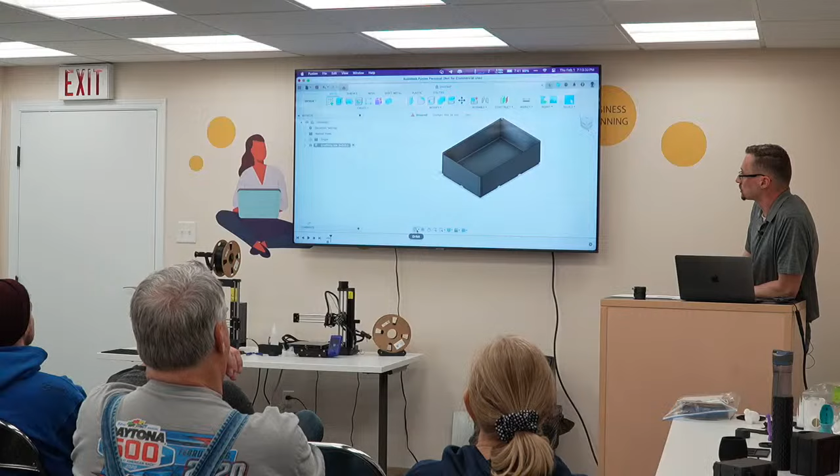And in CAD, let's just say this is a box of some sort. This is just a 3D rendering of an item, and it can be a certain height. You can actually edit it, you can do a lot of stuff with it, you can start from a blank slate, et cetera.

This is a beast of a program. It can be very maddening some days, but I think that's the definition of CAD in the second definition in the dictionary. But more importantly, this is free for personal use, for non-commercial use.

So I can have up to 10 files in this program editable at any given time, meaning if I'm not working on something, I just mark it as read-only and you're still working within the 10. I've never run into an issue. It's a great program, tons of advice online on how to function with this. And as long as you're not using it for commercial purposes, it doesn't cost anything. So it's a really great program.

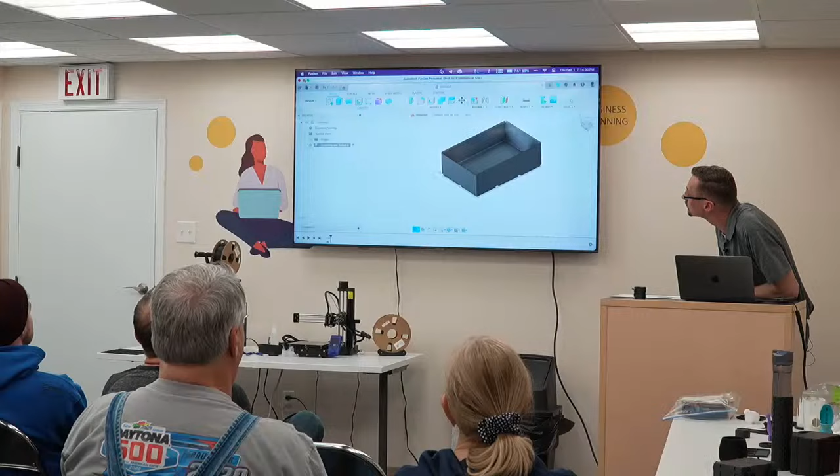I'll exit out of that if I can find my mouse. Two different screens. The other one that's really common and seems to be taking shape right now is one called Onshape. It is a web-based version, if I can say, of something like Fusion 360. I understand it is quite a learning curve to get into, it's a very different mentality to use, but it is completely free for non-commercial use.

And of course, they want you to pay for extras and bells and whistles, and maybe storage or something like that. But from what I understand, you don't need to do that.

Past that, the other one I wanted to talk about is something called Tinkercad. Some of you may have heard of that. I know my daughter has, because this is a big thing in education. However, I actually think this is a really good starting point. Autodesk also makes Tinkercad, and it's fully available online. Let me pull it up here and make sure I'm logged in to show you what I'm trying to show you.

And then I hit the wrong button. But essentially, Tinkercad is a complete online system, just like Onshape. This is designed to be, I'll say basic, but I've seen some people do some pretty interesting stuff with this. The idea is you can create a 3D model - if everybody remembers Microsoft Paint, it's a pretty easy program to just sit and play with.

So you can literally just plunk a box down, make it this big. Hey, I want to throw a hole in here. I can just grab that properly, throw it in here. I'm being very quick, just a quick example. I didn't make that hole big enough. There, the hole is there. So you can actually create a lot of different things in this program.

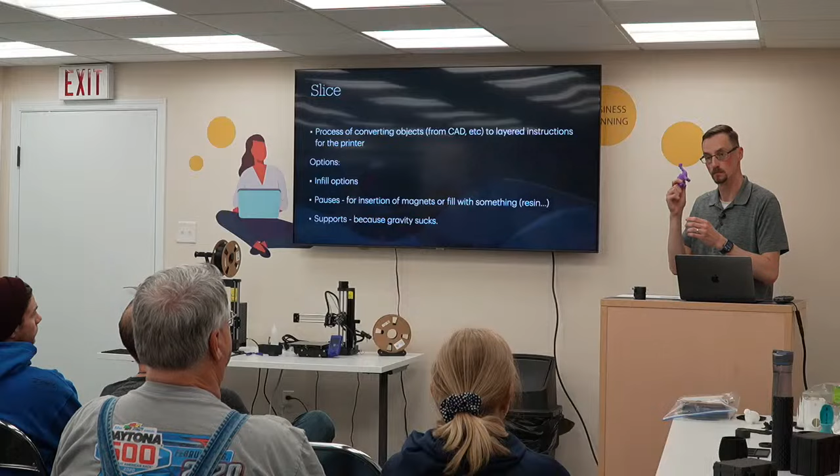And the other next step is you can actually pause the printing, and people pause that for insertion of magnets. This printer, which should finish while we're here today -- that was the plan anyway -- this one's not a print that will actually need something inserted in it. But there are times you may want to put a magnet in, or other people use this for filling with something -- I haven't done magnets or filling it myself, but there are certain people who will fill it with like an epoxy or a resin before it's finished.

So halfway up, it's open, you want to fill it up with something, then tell the printer to continue, and then it just finishes it up, puts the lid on it essentially.

And then supports, because gravity sucks -- these things can only print on top of each other. It cannot print in thin air, gravity will not make that work. So I'm going to show you how all this works as well. But those are generally where we're going to jump into when we slice it.

Now I'm going to actually open up the program I use, called Prusa Slicer. These are Prusa machines -- that's the company that makes these machines. And like I said, they have a printer division, a software division, an R&D department.

They're a big company. And I know others that have heard -- we'll get into maybe some other names of some printers. These are definitely not the only ones, there's a million of them. But essentially, this is what we call a slicer.

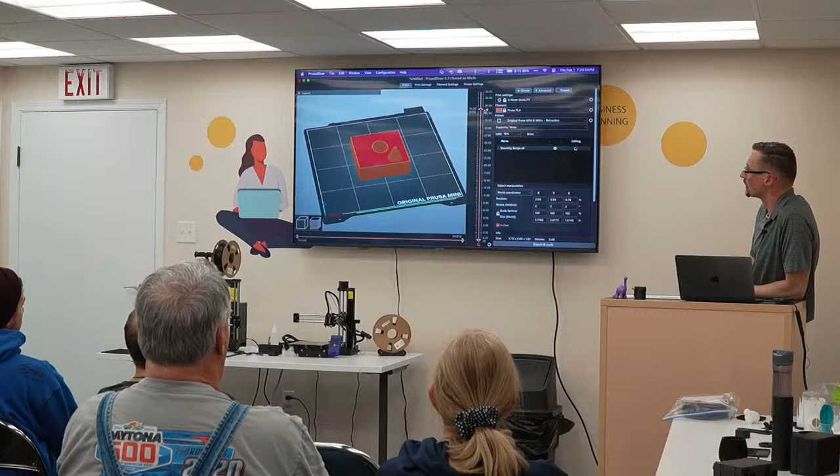Regardless, if we go back to the actual item, 264 layers, I can actually pull back the layers, and you can see here, let me zoom in a little bit easier here. You can actually see here, this is the process of what it's actually going to do inside individual layers. Whoa, that's what's inside.

And if we actually look at this, I'm just going to hold a button down. This is a preview of what the printer actually does. Painstakingly — I mean, not that slow, it goes a lot faster — but this is what you can drill down and see, why is it doing that?

And this is where you can find out, oh wait, this can't print over nothing. Gravity is going to screw us over here. I'll get to what that looks like here as well. But this program is that nerdiness of geometry that's being told where that head is supposed to go, at what speed, how fast that plastic is being fed into that hot end. It's essentially like a glue gun, let's be honest, just pushing that stuff through.

So that's an example of this. I'll change out of that. If we go back to... so one of the first items I mentioned was infill. You can see here all of those kind of jagged lines, and those lines are what we call the infill.

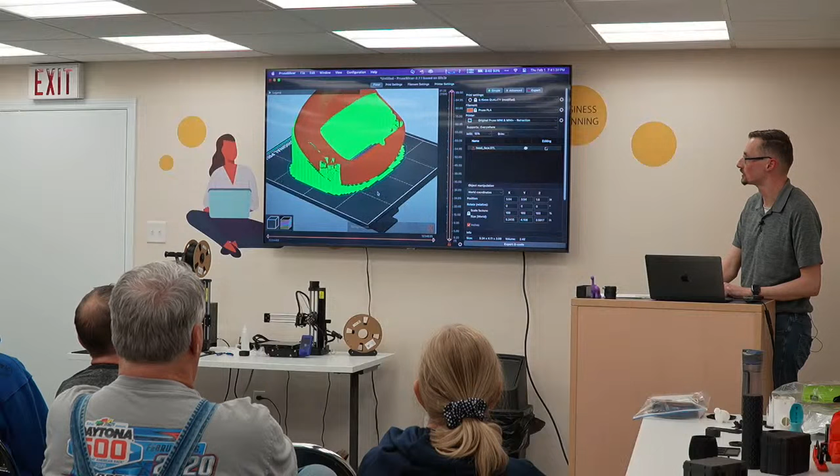So the way we get around this is we actually do supports. The supports are essentially exactly that - think of supports being like 2x4s, when you build things up, even if you have to take them away at a later time. This has been a semi-new scenario for this type of printing. Before, if it wasn't touching the bed, it was going to be a problem, or you wasted a lot of plastic and ended up cutting it away. We can actually do supports, and the supports look a little bit like this, and it's ugly, let me tell you that. So this is an example of putting in a whole bunch of plastic supports to make sure you're not printing this in midair - you're actually printing it on top of other plastic. The nice part is these supports are very, very dense and they easily snap off. However, it's incredibly wasteful, and there's a whole lot of plastic still in there.

In the last year and a half, they've developed a new support system called organic supports. I'm going to quickly flip that on. The idea behind it is, same way we have different infill, those lines inside, we can do something called organic supports. And the idea behind it is, you'll see here in a second, a whole lot less material with the same process.

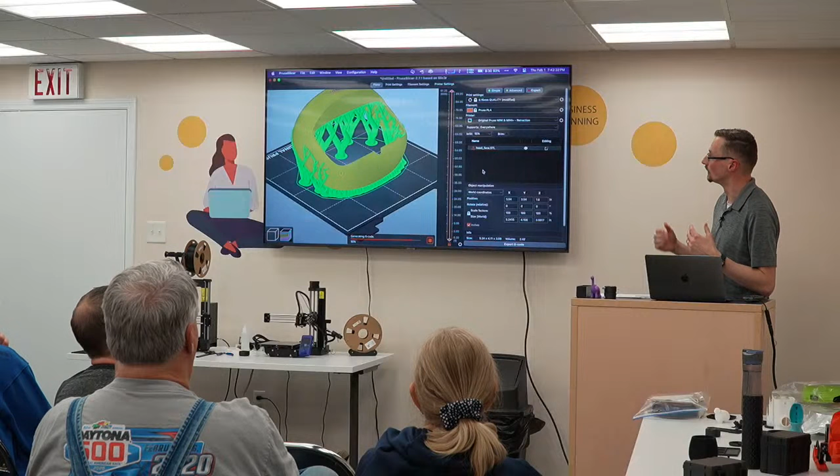And here we are with organic supports - still plastic, but supporting where it needs to without a whole lot of plastic. This has been a huge game changer for this type of 3D printing, specifically because these tree supports or organic supports break off very easily. You can get in there with a pair of pliers, get really close, and snip them off in chunks instead of this whole block of plastic. They've been a real big game changer, so generally you need to be aware of that. And this is all being done post-process - you've already created that object or found it online, and a lot of these places will say put in support where you feel necessary. People say, my printer can do this.

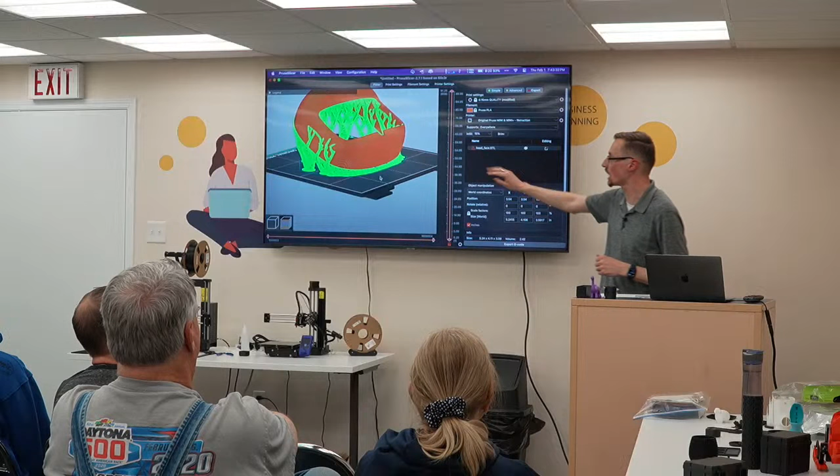8 hours later, my printer can't do this. So it's generally easier to put those type of supports in, and you can actually put your own in. You can go in there with an eraser and say, I don't want them here, I want them here, if you know what you want.

With the app showing the cost for the amount of filament, how much of a difference do the organic supports make? Not a whole ton, depending. I actually tried to do that math before this presentation because sometimes I think this is going to use less filament, and it depends on what you're printing, because those supports are very dense. If we take a look inside those supports by pulling that back, you can see they're actually hollow tubes, so there's not a whole lot of plastic in them. It's just that they're a lot easier to remove, and depending on what you're printing, it can affect speed and sometimes filament. I have seen where you changed it to organic supports and it's taken 20 minutes longer to print.

I assume it's a matter of the head moving around more, as opposed to just printing beside each other the whole time. For the most part, we choose organic or tree supports because they're easier to remove and make a nicer finish.

I printed an item that was part of the robot, where it was so close to the bed in certain spots that I ended up doing another modification, raising and printing the whole thing about an inch off the plate, because those tree supports allowed it to be suspended in the air but easily break off. So a lot of different things to think about here, but a lot of play. These organic supports have been huge for me - when I switched to them, the prints came off and you just snapped them off and there was the item. It was a really big difference for me.

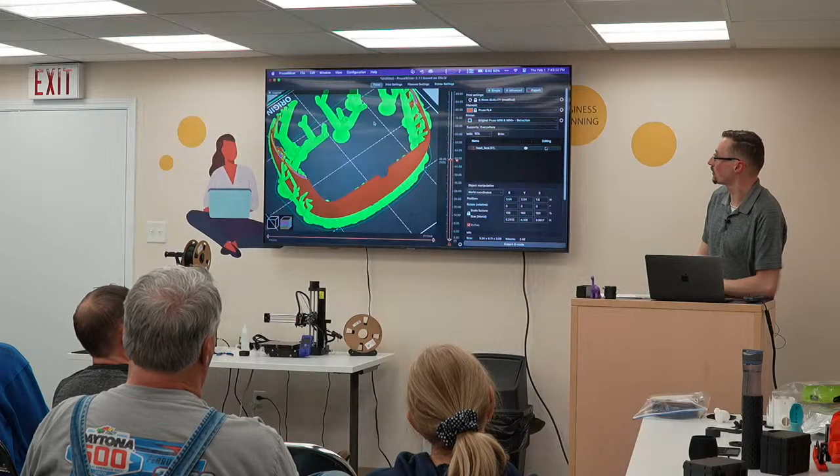Yeah, that's a fair question. So if I go back to the actual model without anything, I'm allowed to - this program is so powerful - I can cut this item into pieces. I can cut them and have the program automatically put in dovetails so that they fit together later to glue. But to answer your question, I can choose to print it on this face.

I can go in here and choose a different plane to be on the bottom. I could flip it onto its side. You can do a lot of manipulation to figure out what you think is going to be best for how it is made. I'll get to that in a little bit about how that structure on top of each other works - sometimes in your favor, sometimes not. Does that answer your question a little bit?

Yeah, it does. Okay, I'll let you continue. Okay, let me know if it doesn't. But yeah, you can do a lot of manipulation here.

Every once in a while, you're going to run into an object that somebody has provided to you that's even too big for your print bed - you physically can't print it. You can actually slice this - which is a play on words, I understand - slicing it in half and allow you to print halves of it, connect them together, glue them together, etc. That's kind of where that finishing spot I mentioned comes in, where sanding and painting and things that I don't do personally, but nonetheless it's definitely an option.

Yeah, so that's supports being the last thing. So exit out of this. I need to make my mouse cursor a different color so it's easier to see.

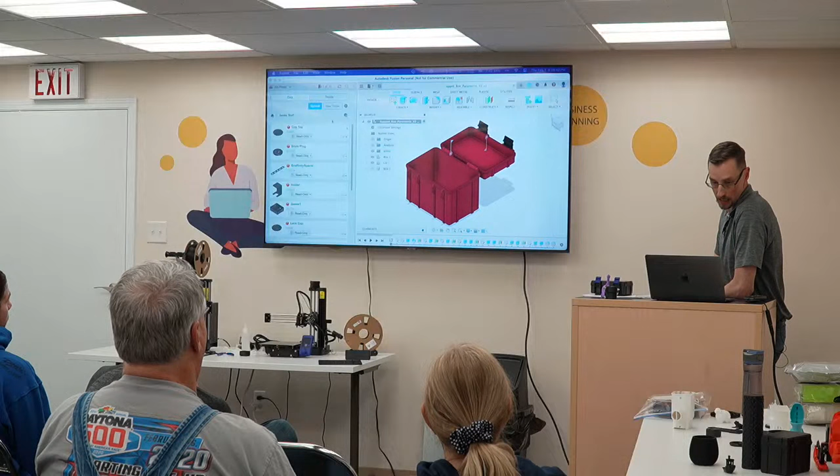So you'll see it quickly here. I can actually change the parameters. That probably came up on my screen, let me just pull that over. You can actually say, no, I want this to be so many millimeters by so many millimeters by so many millimeters, and change this on a whim. So if I wanted to say the inner box depth is 85, I'm just making numbers up, 120, and hit enter — that box, you probably just saw it in the background, changes automatically.

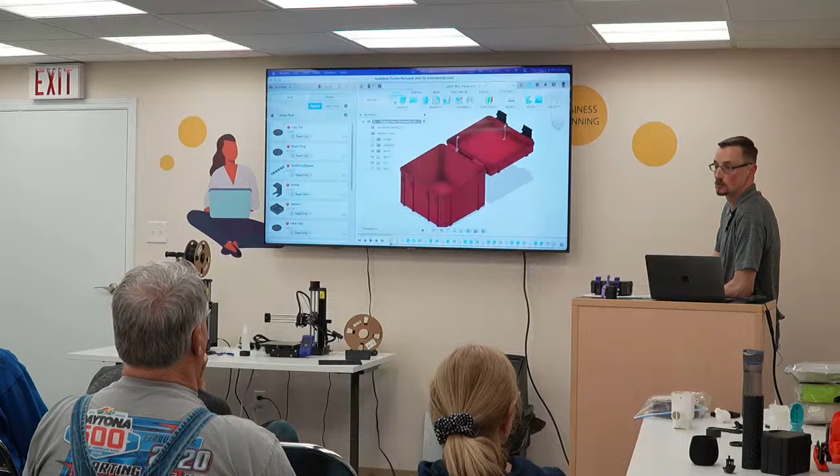I don't need to know CAD in order to make this change or anything like that, and they do some pretty interesting stuff with this. I can add more latches, one latch, I can make it taller, shorter, whatever the case is. These parametric models that people have made allow you to say, here's the model, instead of you taking it and mucking with it — they're the ones that had to do all this work. You can see here in Fusion, this is all the steps they've had to create, or at least some of them, I think it went off the screen, to create this box. They actually made some of these variables, these numbers that they put in here.

They're like, here, we're going to let you change these, and we're going to make them just a variable that you change, and we'll adapt to it. Bigger, smaller, whatever the case is.

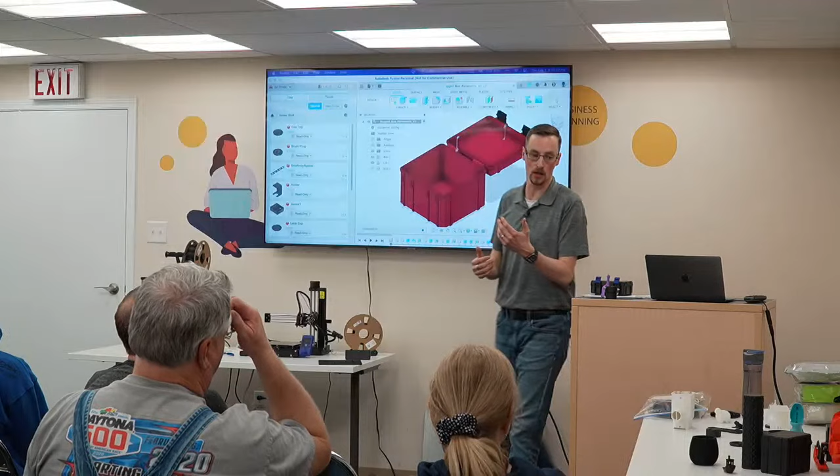One of the other boxes, this is the exact same model, different size. All I've had to do is take the calipers out, and I use it to carry a travel router that I use.

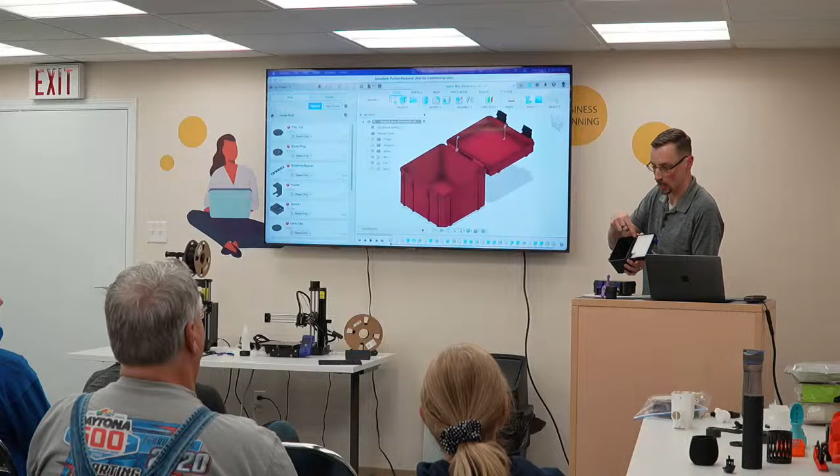And then I just padded it, and away I go. A lot of people, there's actually, you can see the blue, the gasket. And you can actually print that in the TPU, that rubber, and make them more safe for weather. I wouldn't say waterproof, water resistant.

You're right, that's the one where you're like, sure. That's the don't-blame-me-if-it-gets-wet story.

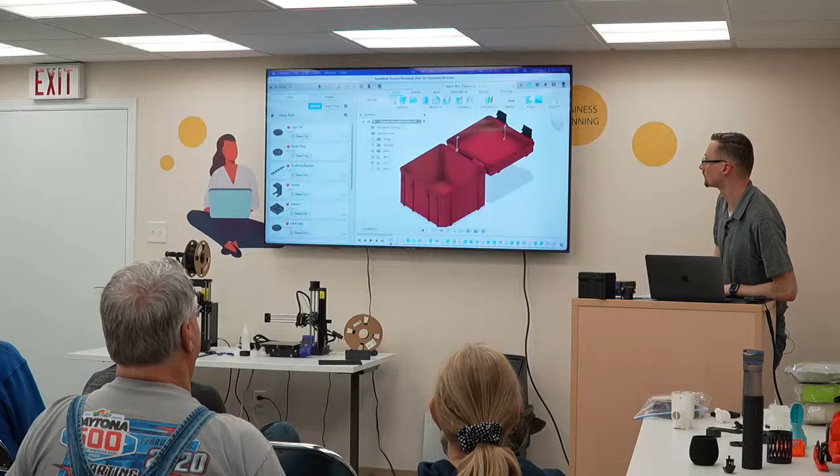You'll actually see here, if I can find my mouse again, so there's actually different parts. So there's the seal. When they design these inside of these programs, you'll actually see that this is the CAD part that's not there.

I don't know if I ever will be, but one day maybe. You'll actually create these in separate pieces, and you'll have to print these in the base as one item, the latches. You could put them on the same print bed and print them at the same time, and then the actual seal as well. You can do however you want, depending on the size of your print bed.

When I loaded up that one model, you can load 3 models, arrange them on the bed, and hit print, and it'll print all 3 models at the same time. It's whatever you want to do and what risk you want to take if it goes awry.

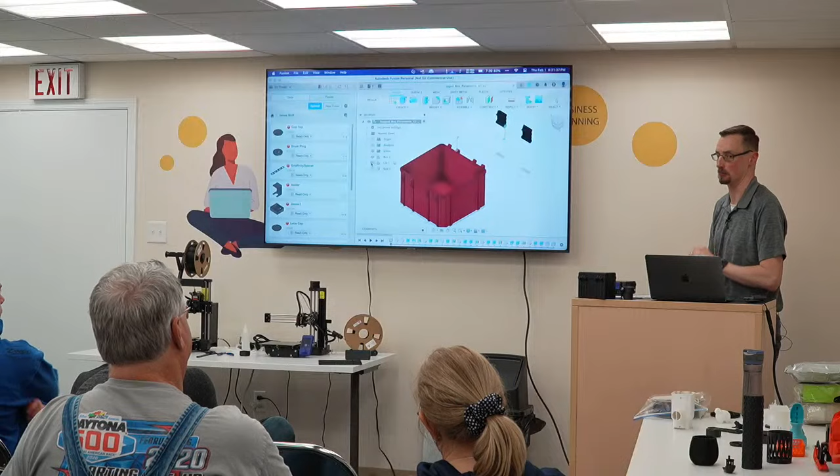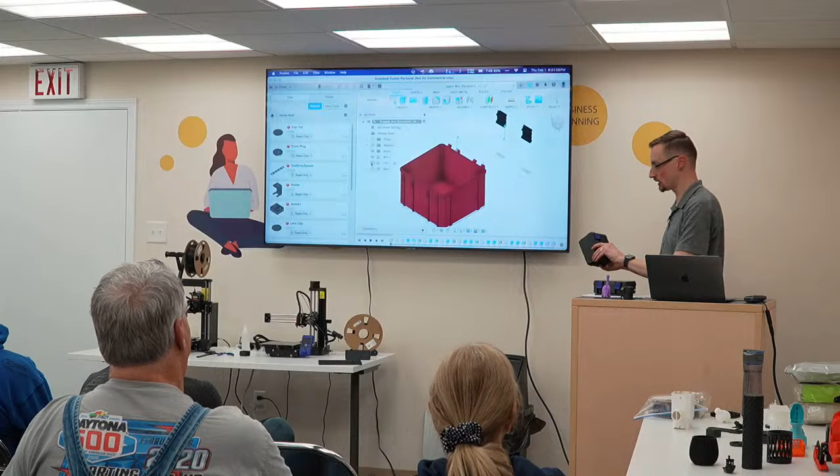That's when I needed to carry this item with us in our suitcase. I took out the calipers, measured it, printed it, tweaked it. And what I ended up doing is, since one part was too tall and one part was shorter, I just went in there and created a base, plopped it in there, and away it goes.

So this is the type of thing you really start playing with and go, I could do that, I can do that, and you can do that. And that's why you have toothpaste holders or squeezers. And 2 printers.

Anyway, so parametric is kind of the one thing that I wanted to talk about. The other topics, I know we're coming on to 8:30 now. One of the things, a couple of things, feel free to jump in at any point in time, but I kind of wanted to talk about a couple things. And I've already touched on one being, there's a million different printers out there.

I would say probably the 3 top brands that exist right now is Prusa, that's what these ones are, Prusa, followed by Bambu. Bambu is up and coming, I would say.

I'm not going to pick on them. I'm going to try really hard not to pick on them. Prusa is considered open source. They open source their parts. In fact, if you look close enough at the printers, they actually print some of the parts for the printer on a 3D printer.

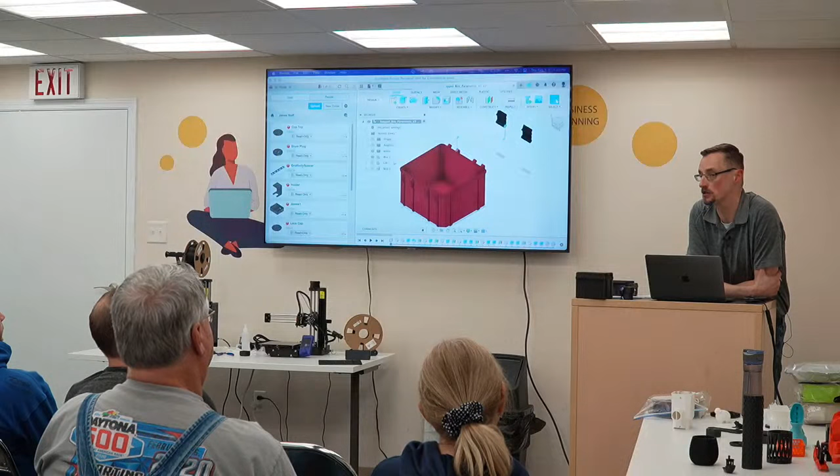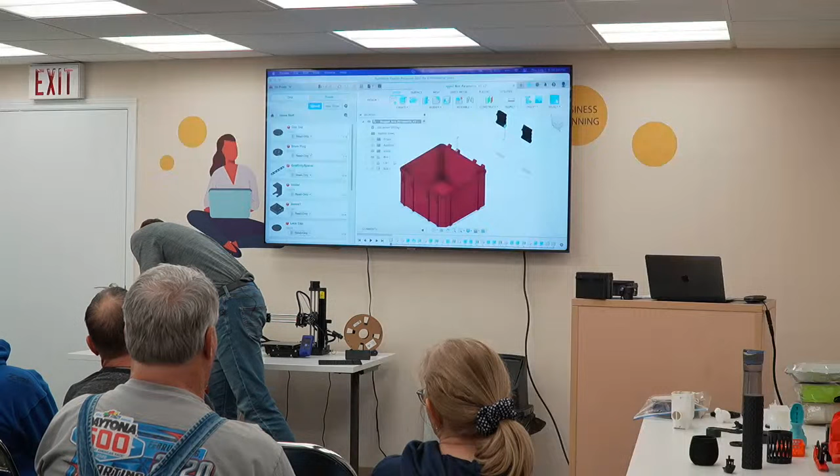If you do the proper maintenance on these printers, after X number of hours you're supposed to do something. This printer here is about 6 months old. I'm not proud of this, but here goes: print time on this has been 61 days and 2 hours, and filament used is 3.4 kilometers.

And that's just my second printer. I tried to pull it up on my other one, but I did a firmware upgrade on it and it wiped it, so it would be more. That's all I'm going to say.

How often do you find you have to level it? No, if you don't touch it, never. The MK4, the other printer, its claim to fame is it's got a load sensor in it. So the head has to be an exact measurement off of that bed because you need the perfect amount of squish for the layer lines. You have to dial that in. It's quite easy to do, on mine anyway. But this printer, I have to dial that in.

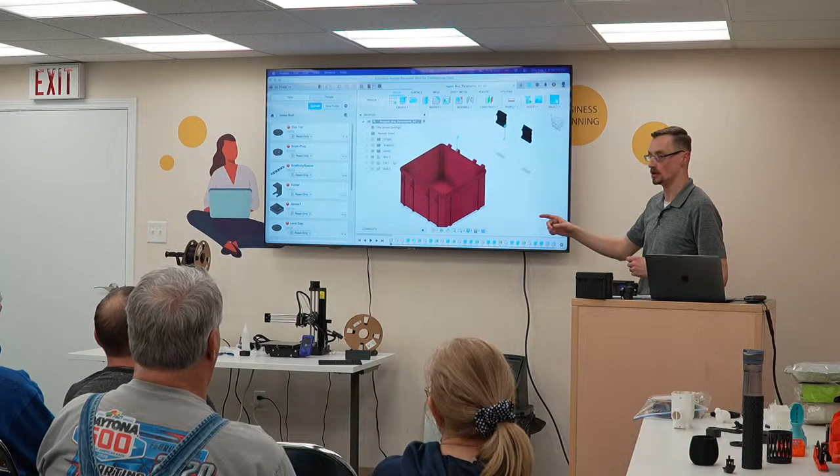So if I change it to a PETG or a TPU, you actually have to redial it in. The MK4 is designed so there's a load cell, essentially a pressure sensor. If I change to a different type of filament, I tell the system I'm changing to TPU, and it says okay, cool, we know we have to do it at this temperature versus that temperature, and away it goes. As soon as it touches that bed, the sensor knows where we're at, and you get a perfect first layer every time.

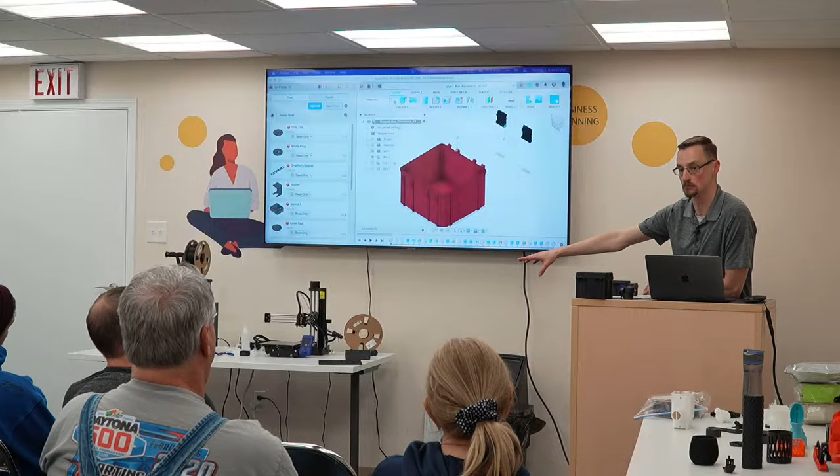I've never had to touch that printer since the day I took it out of the box, and that's its claim to fame. I might have to play with it every once in a while. When I transported mine here, I had to retweak it, which I just load up a little thing and dial it in, move it until you get the perfect line or layer, and I'm good to go again.

Again, there are pros and cons to these more brand-name printers. Bambu and Prusa are designed to be workhorses, get printing, not too terribly bad. I think some of the new Enders are definitely getting better with that, the software and stuff, because they realize they just want to get people printing. People that aren't printing are just getting mad.

So a buddy of mine, Jeff, the guy we blame everything on, had this printer for about two years and actually set it aside. He said, I can't get this thing to work. So then I bought one and I'm like, this thing's great. He's like, well, how'd you do this? I'm like, well, read the manual and it says it does that. I'm not going to say I figured it out myself. Then he starts printing with it and he's printing fast and furious now, and he's actually looking at buying a bigger one too. So it's probably going to be my fault.

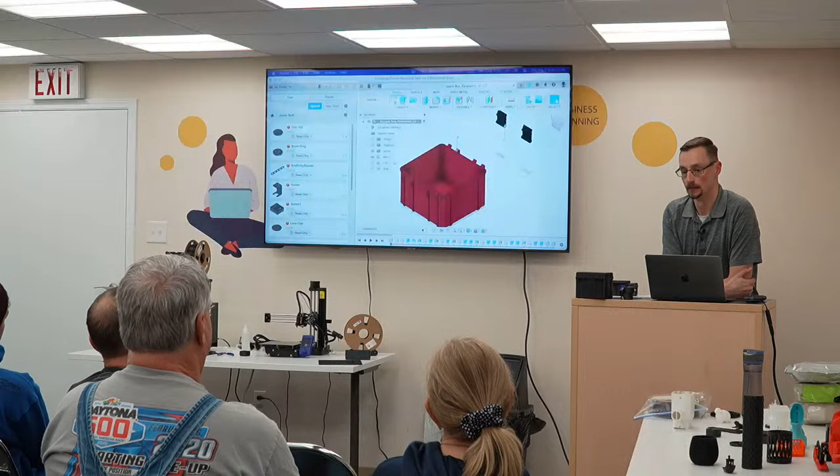His wife will blame that on you. Yeah, that's kind of how it works, doesn't it?

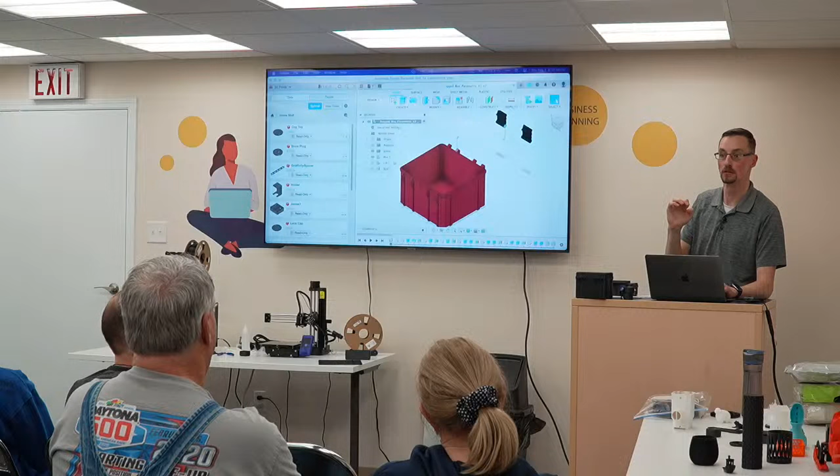The only other thing I wanted to touch on really quickly is, and I'm kind of surprised nobody's brought it up, is color changing. Bambu is probably more known for this. That one over there said it earlier - changing filaments and color filaments. Oh, did I miss that? I'm sorry, Alistair said that maybe?

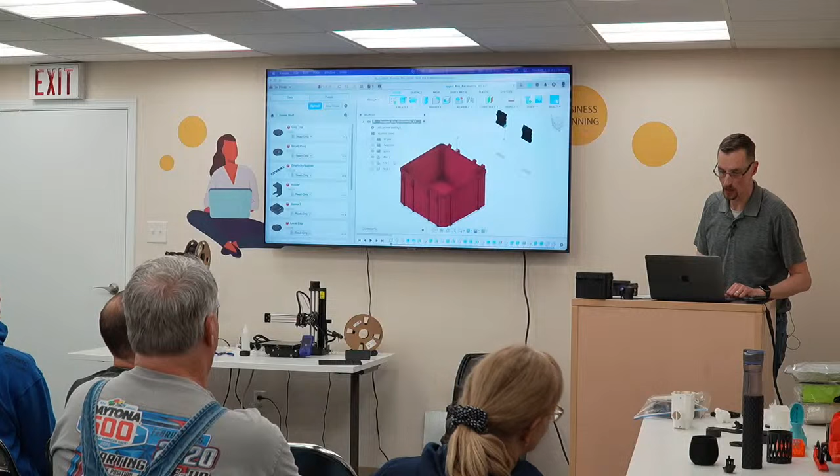Okay, so one of the things people want to do is - okay, you can print blacks, that flower vase is black, that's great, but that's kind of black and boring. Sure, you can mix it up with different colors and stuff like that. But we can actually take - and I have no idea what this thing is, I found it yesterday, I'm not going to lie to you guys - this is Doraemon, I don't know what it is. But what happens is you can actually do filament changes to make this a different color.

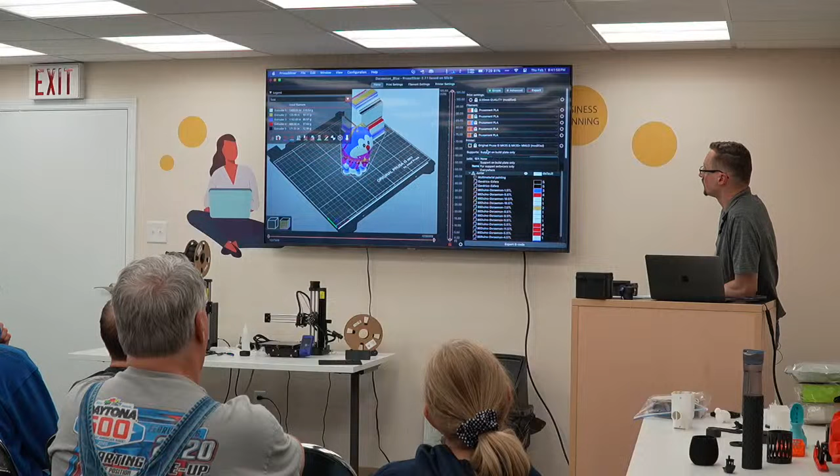Let me just slice this to make it look like something here. Give me a second. The idea behind it - I was going to mention Bambu is kind of ahead of Prusa quite a bit in this case, but I've been told by my wife I'm allowed to order one, I swear. They actually make a unit that can change this. So what you're seeing here is an item - if I get rid of the supports, it might be easier to see. Okay, if you look at that, if we pull down the layers, you can see in this layer, that layer - that might not be a great example, but if you look at this, one layer's got three different colors on it.

So how does that work when you can only put one layer on at a time? Bambu has got a unit that does this already. I'm just going to go quickly to what I'm going to buy. Essentially, they make something called a multi-material upgrade kit, and this is essentially what sits on top of - I can just, we'll add it on.

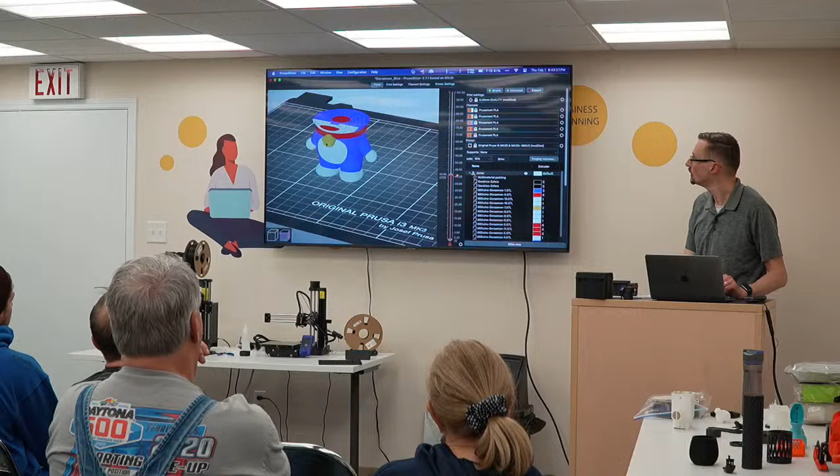Might have screwed that up.

So do they have different nozzles then, like when you feed it? Nope, it's the same nozzle. It has to be the same nozzle because you can't - you'd have to actually stop and cool it down. I don't know of a way to do that.

But in this case, you see here, this is what they call a wipe tower. If we want to talk about waste, this is where it comes in. Because after it changes color, it has to purge a little bit of filament out so that it's not black going to red, it's actually red. So it's incredibly wasteful in the sense that it goes off to the sides, purges it, and changes color.

And when you're doing a layer like this, one layer, you're doing 4 color changes. So at the end of the day, however many layers this print has, we're looking at thousands of actual color changes. And you don't want to be sitting there changing it manually.

I've done 2 or 3 small trinkets where I've told the software to stop and change colors, which just puts a pause in to say change the filament, unloads it, and so on. It was brutal. I changed it from one color to the other, and it was brutal.

So if you have to do this thousands of times, you need to automate this. That's not even something I'm doing at the moment - it's something I'm looking at in the future, and even then I'm not sure it's something I need. So I haven't ordered it, but my wife told me at the end of the year I could order it, and I got a recording of it. No, I didn't.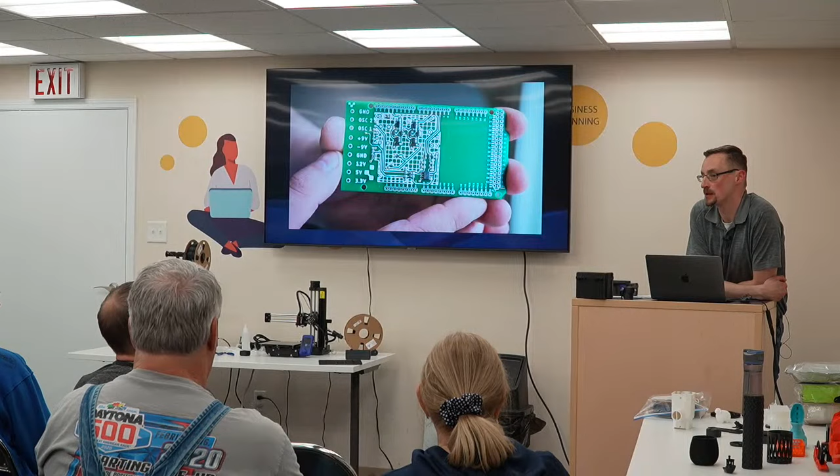I think generally you're printing those in locations that don't necessarily need insulation. Oh yeah, obviously. Yeah, I'm not printing my house anytime soon, but that's a fair point. And it's one of those things that makes your head go, oh, it's this tiny today - where could it go?

I got a friend who printed the Parliament building in Edmonton. He was a cartographer, is that the word for it? They drew maps or something. He drew this whole thing with all the gargoyles, everything on it, and printed the thing. Yeah, and there's a huge community around this.

You go into these websites that give away the models and let you make your own models. I would say it's at over 50% figurines and painting, and that's great, it's just not something I've gotten into.